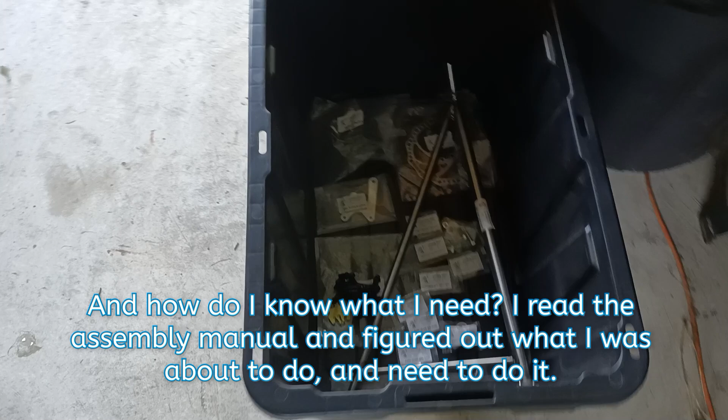Alrighty, so this is one of the boxes, the landing gear one, which I had mentioned in the inventory video, that I've got all categorized and all nice together and easy to see. What I've done though is I've taken the parts that I know I'm going to need for the landing gear and I've put them into my working box. And this is pretty much everything but the tire and the rim, aka a wheel.

And I'll be pulling the parts out of here. You just group them by common sense. You know, you're not going to be putting on any cables or anything, so they're not in here. So everything that I need to build the left landing gear is in this box. I hope. I'm pretty sure I have everything I need. If not, simply go back to the landing gear, find the part you need, and keep going.

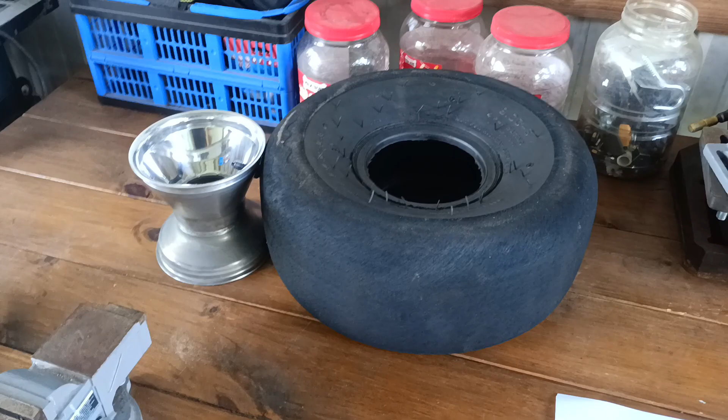So back over here, we're going to take a quick look at the tire and the rim, or wheel, as it's referred to in the manual. We've always known these out in the West as rims, but I guess they can be called wheels too. We've got the tire. Mine are tubeless tires and non-split rims. If you have split rims, the installation is rather unique. Definitely go online, see how split rims are put together.

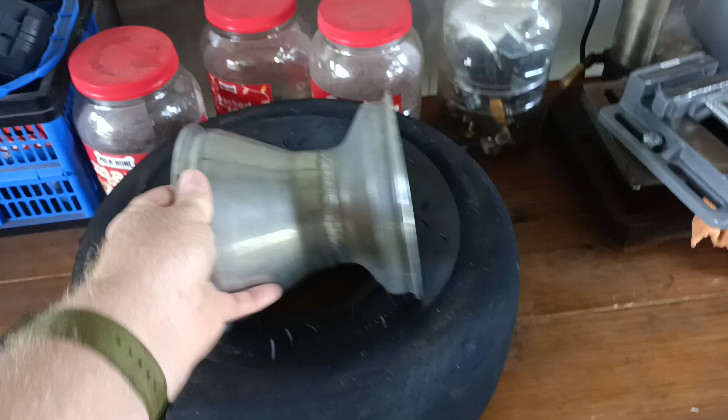And there's a lot of good people out there. Look at how aircraft split rims are put together, not somebody's tires on their truck or something like that. That's a little different. But the procedure is close to the same, though. You got to be careful on split rims because you've got two pieces here that clamp together, and bolts hold them together.

And because they are split, sometimes the tube will get caught in here and get pinched. So there's ways to get around that too, so you can get a tube in there without it being pinched. Some people put tape around the split, and as it comes together, it protects the tube from getting caught in the split. Others put a little bit of air, very little, but just enough in there to where the tube sits in here, but it won't get pinched.

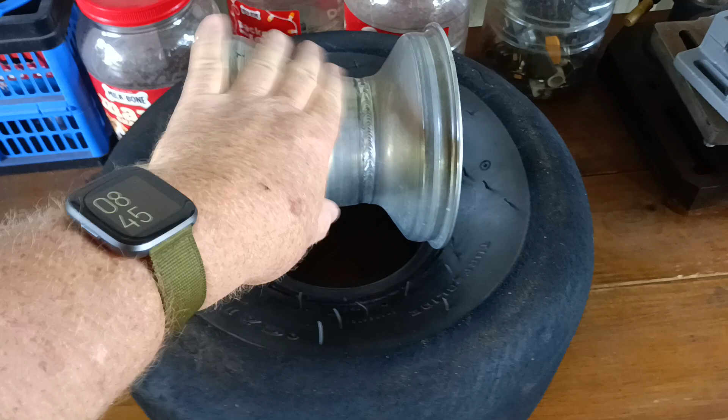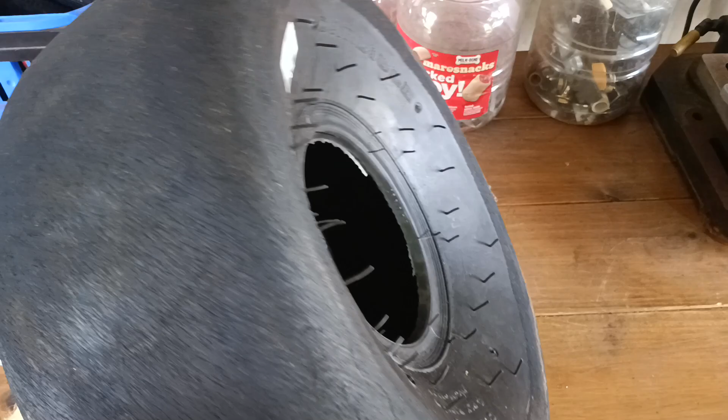Some people just take them to a shop and find a shop that'll put them together for them. So that's also an option. What I've got is a little bit different without the tubes. These are tubeless tires. You definitely have to get the bead here, which is on both sides of the tire, of course, against the edges of my rim.

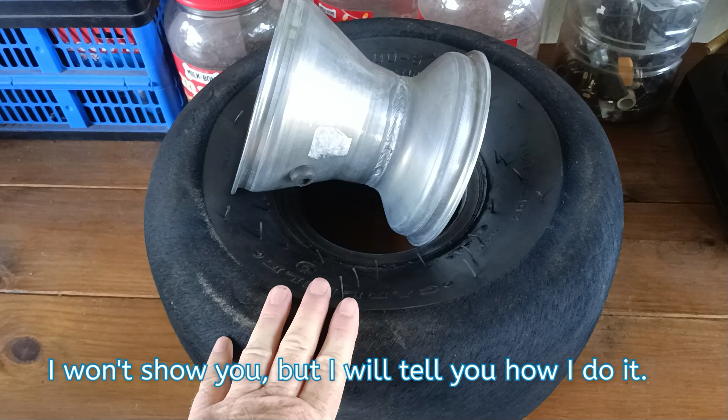And to get it to do that is kind of a pain. There's several ways of doing it. I'll explain that when I get there. I won't show you the way I do it, just to give you the ideas of what's available and leave the decision up to you.

Now you'll see that the rim, or the wheel, is almost as wide as the tire itself. So how does the bead of the tire get clear out to the edge of the rim to pop on? That's one of the things I'll explain to you. I won't show you how I did it, but I'll explain it, and you can make your decisions.

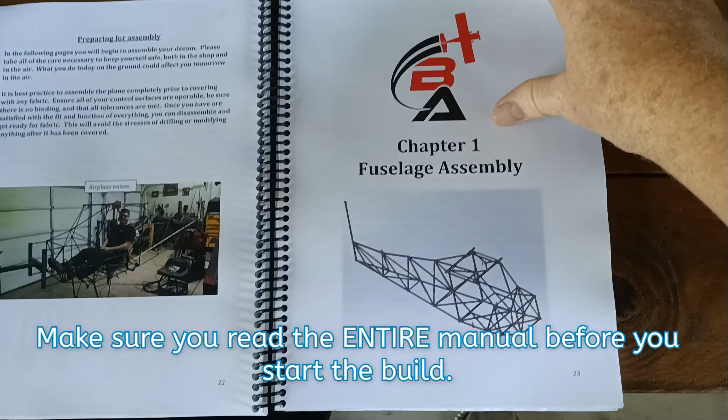First thing, though, is to jump to the manual, Chapter 1, fuselage assembly, and the first section of it is landing gear, main landing gear and brakes. So read through this section of it. It explains some of the things you do and do not do. Just good information. Now, like I told you in the inventory video, this is not IKEA. This is not step-by-step. They're not going to do that with you.

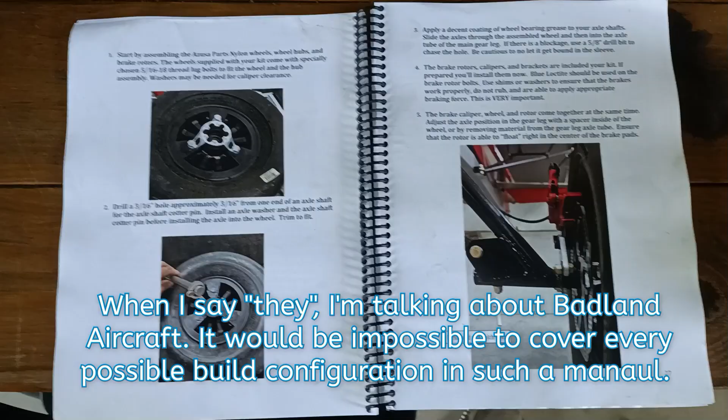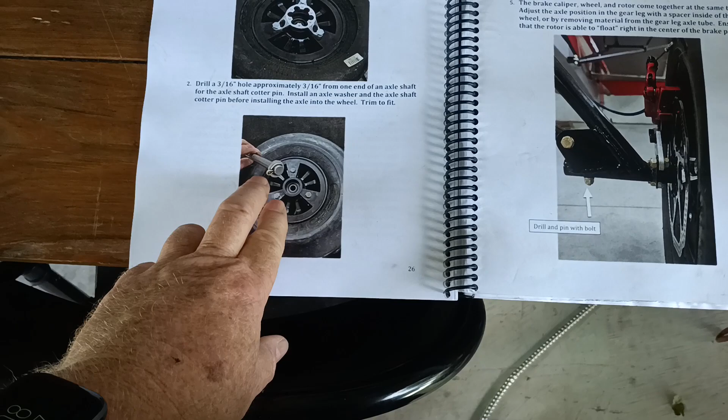The manual would be thicker than the Bible, thicker than the IRS tax documentation. What they do is they give you general information on how to put this stuff together. Some of the pictures will apply. For instance, this one does, and some will not. This one doesn't apply to mine because I actually have an axle with threads at both ends, and I put a nut on, where this is a washer with a cotter key to hold the wheel on. So it may be a little bit different.

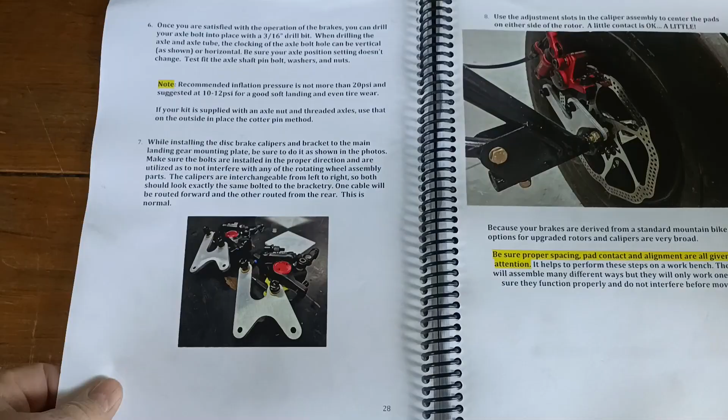You have to think things through a bit. There's plenty of pictures to see how things are done. And again, ask questions if you don't understand. I'm terrible with comprehending written documentation. I'm a learner by basically seeing it done.

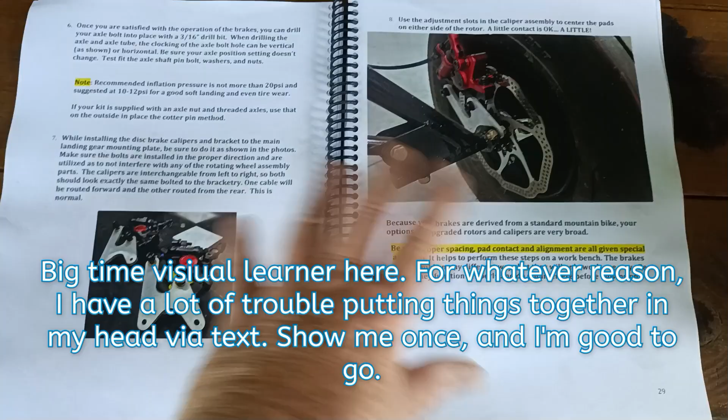Visual learner, there we go, there's the word. And so this is really difficult, and we're just talking the wheel here. It was really difficult for me to first understand it until I got with some of my friends on the forums and said, "Hey, what's this mean?" And they explained it, and we discussed it a little bit, and now I understand what's going on.

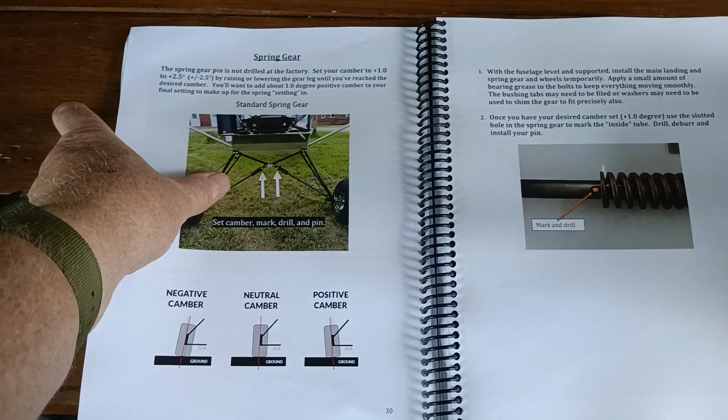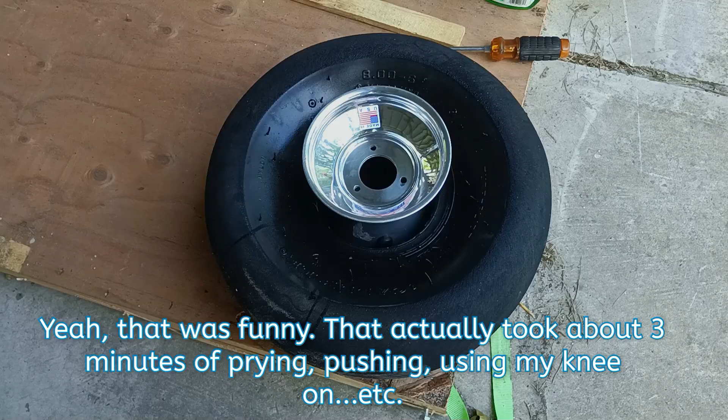Alrighty, well, whew, I got the first side in. That's going to be the easy one. And yes, I had to use a screwdriver and slowly pry it in until it slid on there and got on there all the way. So let me get the second one going here, and we'll see how long that takes.

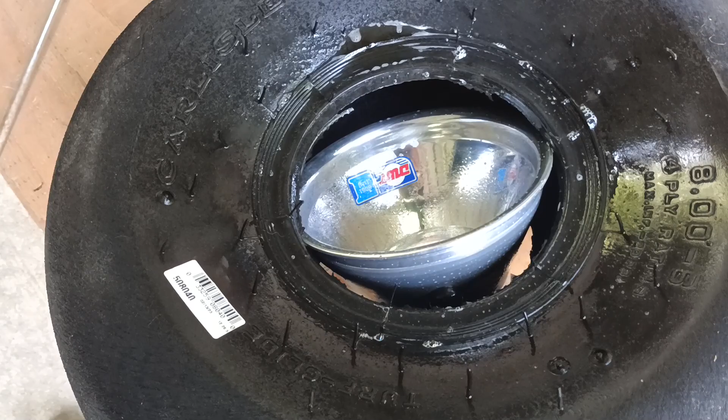All right, so I've got this one started, the other side of it, but notice there's soap around that. So definitely use your soap liberally. It helps to slide this stuff around. Otherwise, that rubber sticks like glue to that rim or that wheel, and it's a pain in the butt to get in there. So definitely use a lot of soap. It's not going to hurt anything.

Okay, one aired up tire. So how did I get these beads to seat against the rim so I have a good solid tire? Well, it's not too difficult, really. The way I did it, I kind of regret saying this because somebody's going to screw it up for sure. As you know, the tire did not touch the rim. The bead did not touch the rim. That's a problem.

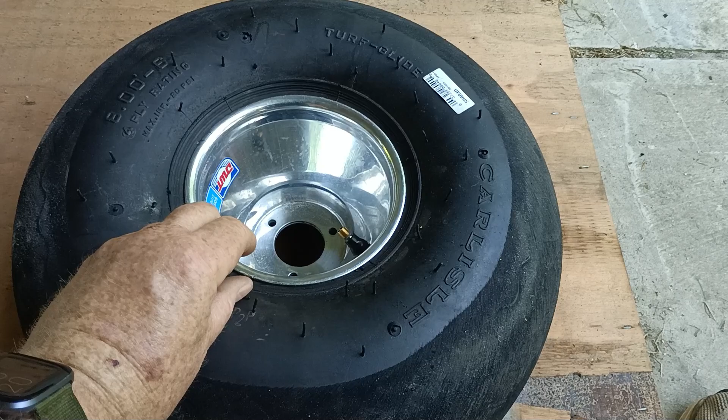So what you end up doing is laying it flat like this on a surface, and there's the gap between the rim and the bead, and very, very lightly you squirt some ether starting fluid down into the rim, all the way around. The big problem that you see on YouTube is people dump half a can in there. Yeah, it doesn't take much. Just that's it. That's all that's needed.

If you do not enough, it'll just flame out and be fine. If you put too much, you're going to blow this thing all up and it'll be nasty. So number one, not very much ether down in there. Very, very little. Do it all the way around. Do not just do it here because you won't get an explosion, and that's kind of what you need. You need an explosion to pop this tire out far enough so both beads on both sides touch the rim and they'll lock in place.

Now, here's the next one that these idiots on YouTube keep forgetting about. You see this valve stem down in here? Take it out. Use a valve stem tool and take it out. That gives air some place to go instead of exploding a tire. You may save the tire that way if you put too much ether in there.

Just be very, very careful in doing this. You do not hold a match down here. You don't want to be near this. You want to have a propane torch or something like that, a lighter with a long extension on it, just something that you can get close to that ether.

Once it gets in there, it's going to pop this tire real quick and pop both sides out, and they seat. And then once it's cooled for a moment, you can go ahead and put your valve stem back in, and then you can air it up to about 6 pounds, which is what I got this one at. But you can air it up to whatever you want. But very, very important. Let me reiterate once again, this is dangerous. It's not the best way to do it.

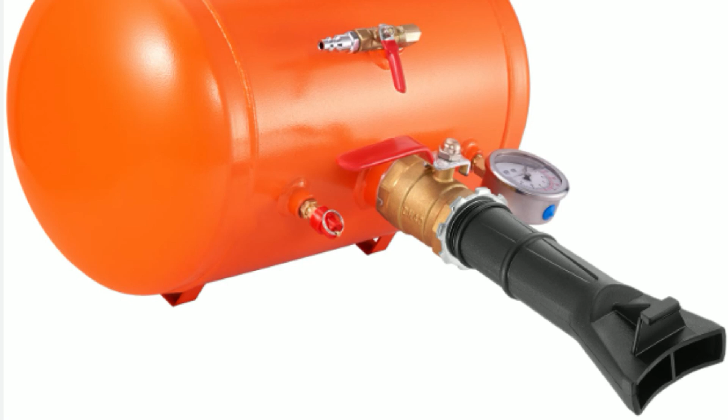The other method uses a large air tank with a very large nozzle, and they stick the nozzle down towards the gap that's between the tire and the rim, and then they pull a very large valve that shoves air in there so fast that it pops the tire.

Now you can take it to Discount Tire or any other tire place, and they can do that for you. It's a safer way to do it. It's much easier to do. There's no chance of getting anything to explode on you. This is the way I've always done it since I've been 13 years old. It does work if you do it correctly and if you're safe about it. All's good, and I have a tire ready to go.

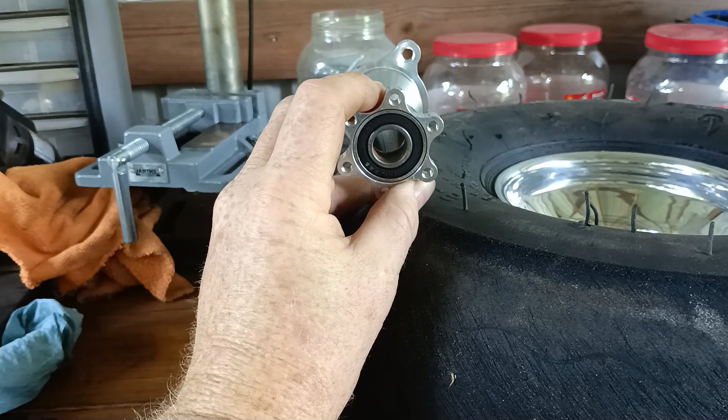Okay, so our next step here is to put on the hub, which is going to hold one side to the rim; the other side, the six-starred side, holds the disc or rotor for the brake. And as you can see on this, I've already got the bearings in here. And I'm sorry about that. I should have waited and showed you how I did this.

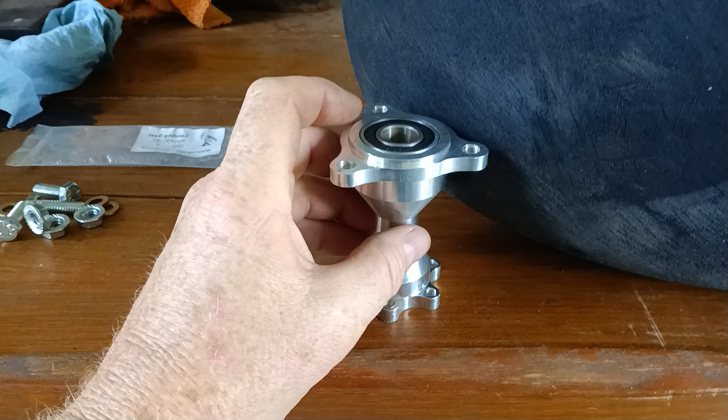Lots of times these bearings won't fit inside of these pieces of aluminum. So the normal thinking is, well, get a block, put it on top, and pound them in with a hammer. That's probably not the best way. One of my friends, again on the Badland forum, said, take the aluminum, put it in the oven, 350, 400 degrees, let it get really hot. Take the bearings, put them in a plastic bag, and throw them in the freezer. Let them get really cold.

What that does is it shrinks the bearing down, and it makes the hole, this part here that the bearing fits in the aluminum, expand. So the two slide together. In fact, they'll fall out typically. You got a hot glove, of course, because this thing's going to be really hot. And you'll drop the bearing in there, and then you'll turn it over to put the other one in, and the bearing falls out on the counter. So just something to be aware of.

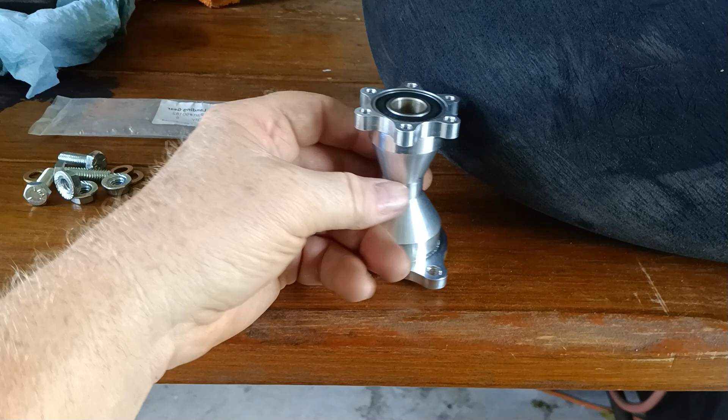If you're going to do that, lay it on its side and then flip it up real quick so it holds that bearing in there. Once the aluminum cools down and the bearings warm up a little bit, they're not going to come out. They're in there for good. So that works out real well.

So how's this go in the tire? Well, pretty simple, really. You're going to have your disc right here. So you can see that looks pretty good. That actually would work, but this would not work. Number one, the disc isn't going to be far enough out for the caliper to get to. And two, how are you going to air up your tires if you've got this disc in the way? So it's obvious that it goes the other way, just like that.

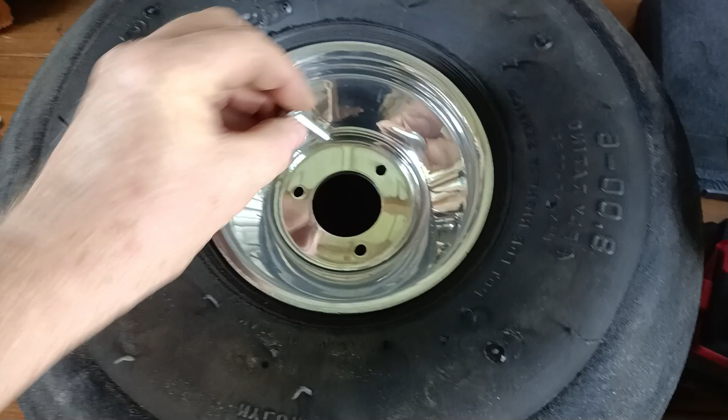Now I had a little trouble with the right tire, and I've had a little trouble with the left one, and I'll show you. These are the bolts that came with it, and look, they won't go through. So I've got to drill these out slightly. I believe that's 5/8, I'm not sure. I'll have to match it up and make sure. And also, as we screw this in, if I can get it in with one hand, there we go. The threads aren't real clean.

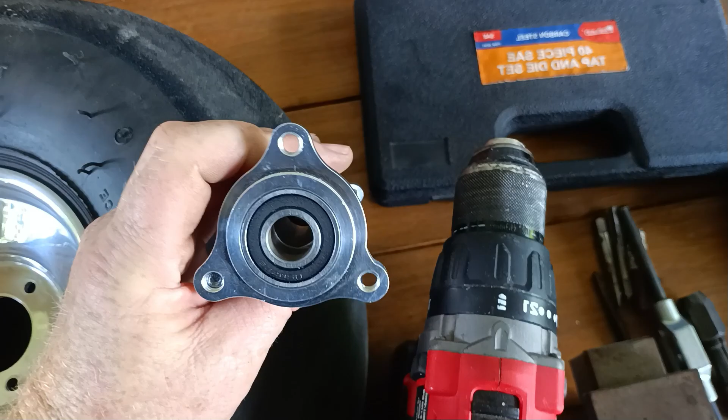So over here I've got my drill. Where'd I put my bits? Oh, there they are. Got a set of cobalt drill bits. Definitely worth the investment to have new drill bits. Also got my tap and die set, so I'm going to tap these out and make sure the threads are clean, and then drill these out to make sure the 5/8 can get through them. So let me get that done, and I'll show you what it looks like afterwards.

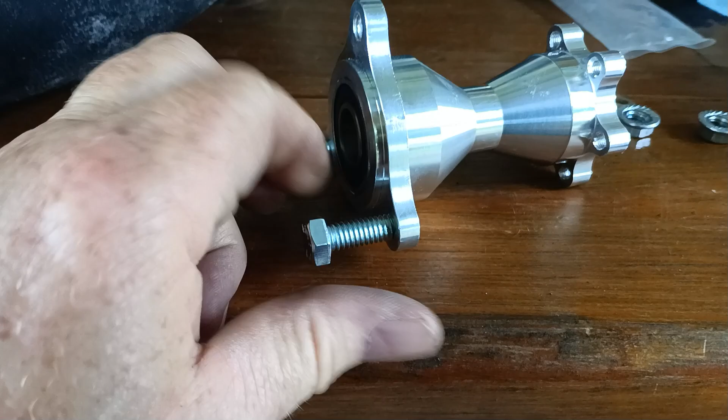Okay, so I've got these threads retapped, and as you can see, the bolts are going through really nicely. So I will put these on the wheel, or rim, as I call them. The way these bolts go in, it's up to you really. Some people have the nuts on the outside of the tire, so they just unscrew the nut to get the tire off, and these act as studs through the aluminum, through the hub. I don't particularly care for that design, so I've changed it up a little bit. I gotta get this all the way out, a little booger.

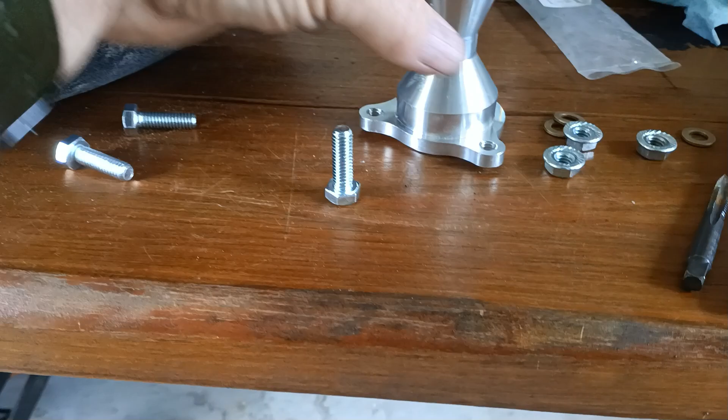I'm actually going to go a little bit different. I'm going in through the rim this way, and so the bolt comes out the other end, and then, because these are threaded, I'm going to use the nuts to lock down on this side of it, which will lock the threads in this hub and in the nut, and these will never back out. It's virtually impossible for them to back out.

Now, to take the tire off, of course, I have to loosen up the inner nut, which may be a little difficult to get to because the ring is going to be up here for the brake, but I think I can snake down a socket wrench through the holes that are in the ring to loosen these up, and once they come off, these should back out from the other side without a problem. But let me go ahead and get those on, and we'll move forward. Slow but steady.

Okay, I almost forgot this step. These bolts won't fit through there. You can see they're just too tight. I forgot to get out the drill bit and drill these out. And by the way, I kept saying 5/8. These are 5/16. And how do I know? It's the only drill bit I've used so far out of this kit, so they have to be the 5/16.

Or excuse me, let's see. Yes, they're the 5/16 because they're here. Yep, definitely 5/16. So let me drill these out so I can get the bolts through the other side and screw them into the hub here because these are threaded, and then put the nuts down on them and should be good to go from that point.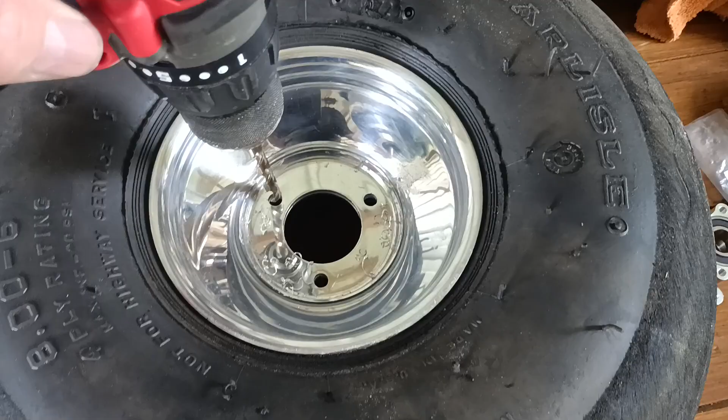All right, all drilled out. Let's make sure. Voila, that's the way it's supposed to work. If I can get it out of there. There we go. One of the things you need to know when drilling out holes like this, and this is covered in the manual: don't use any pressure. Just put the drill bit up there when you're drilling anything that's got to be cleaned out, and the drill will fall right through there. It'll go through straight, is what I'm trying to say.

If you put pressure, you might tilt it back or forward, and then your hole's not straight. If you just hold it on there centered and don't put any pressure, just start up the drill and let it slowly dig through. They cover the better ways to use small bits and large bits, and how fast you should run the drill. So just take that into consideration and you'll be fine. These are good straight holes, so I've got no problems.

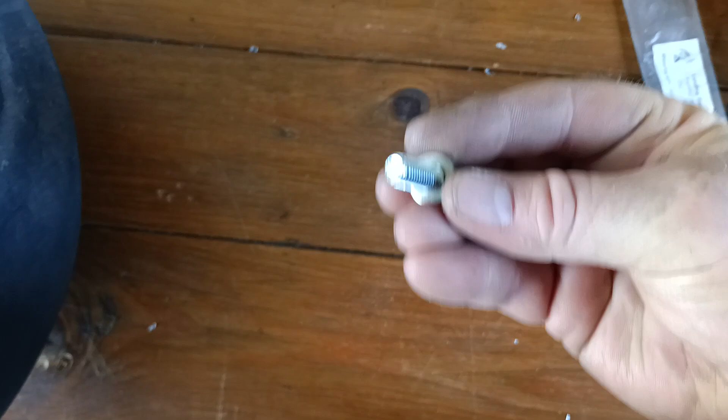Now, these bolts come with washers. I'm putting the washer on here because I don't want the bolt itself to dig into this aluminum. The washer on the inside isn't going to make much of a difference because there's no way for this bolt to unscrew itself. Let me get this all the way down in there real quick. Now I'm going to take a socket and tighten these up a little bit because they are definitely threaded on this side, as you can see in this aluminum piece. So they're holding everything quite nicely together.

And then once I put the nut on this side, which these are locking nuts, and tighten it down, it's pulling the threads that are locked inside of the hub and pulling the nut down on them, compressing those threads. So there's no way that this could ever back out. It's just not possible unless this nut comes off, which with it being a locking nut, it's not going to come off.

And even then, let's say that this does back out. This bolt has to unthread itself all the way out before it would let go of this hub. So it's got quite a bit of, I guess you could say, retaining power. So let me get these nuts on here, and we'll be just about ready, I think, to put the disc on. Okay.

One thing I want to mention is remember that these bolts have to be pretty tight, but you don't want to over tighten them. Remember that they're actually cranking into a piece of aluminum here. So if you know anything about aluminum, it's very strong, but you can strip out the threads fairly easily. So get them good and snug, really good and snug, but you don't want them over tightened, otherwise you'll just strip it out and you'll be buying a new hub.

So the nuts now, because they are locking nuts, will slip on here quite nicely. There we go. Spin those down, and I'm going to go ahead and put the other two here on, and then we'll move on to putting the disc on. Piece of cake.

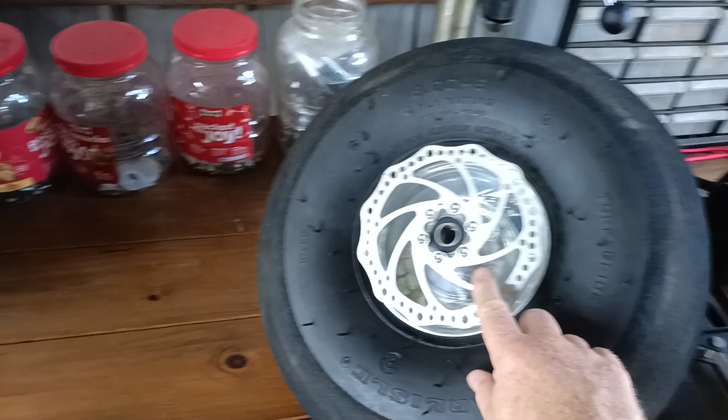All right, let's see if I can keep my finger out of the way. I went ahead and put the disc or rotor onto the hub here. I didn't think I needed to really show you how to do it. It's 6 bolts here that come with the kit. Now there is one difference that I've made on this that you don't know about, and that is I had to stand the disc off.

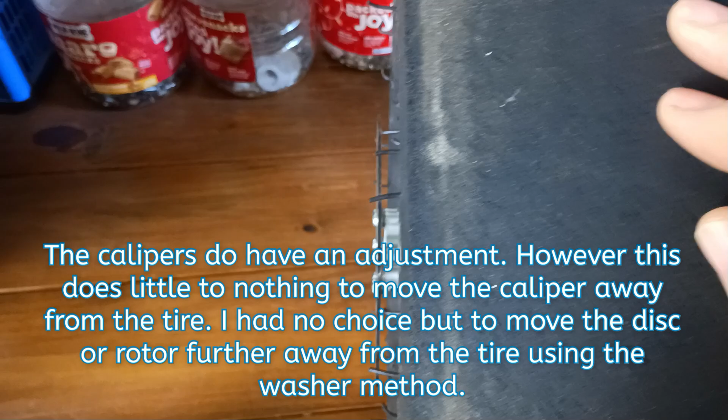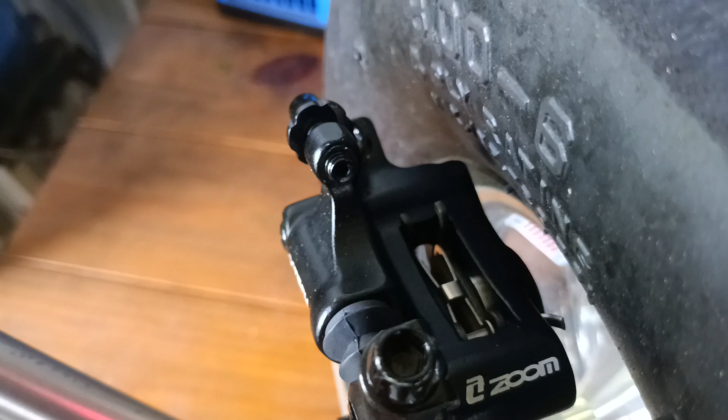Let's see if I can get a shot right there, just a little bit. Come on, focus. Doesn't want to focus for me. Just a little bit off of the hub because my calipers would touch the side of the tire here. And so I've had to put washers in between the hub here and the bottom of the disc so it pulls it out slightly. And on the right, you can see it's still fairly close. It was much closer. In fact, it rubbed when I had it without the washers on there. So I had to put washers to bring this out slightly.

And you don't have to worry about it too much because the hub itself, you can see my finger on the other side there. There's nothing supporting there. It's all supported directly under the bolt. So as long as you've got the washers in there, that's just as strong or darn near close as having this disc or rotor directly against the hub itself. So it's no big deal. Got them in there and got them in the way that I like them. They seem to work well.

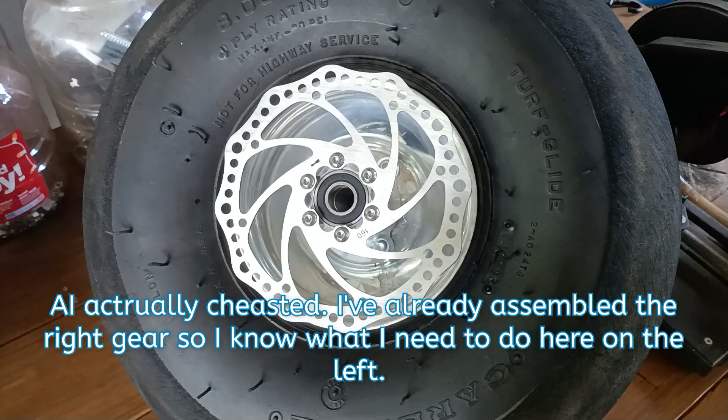So our next step is to move on to putting an axle on and then starting to assemble the A-arm, which will come up here and hold the landing gear. And I've got to make adjustments there. I already know what I've got to do because I've already made them over here, but I'll show you what I've got to do. You may not have to do these adjustments, or you may. That's going to be something you'll have to assemble, start fitting pieces together, see if they fit well. If they don't, make the adjustments necessary to make them fit well.

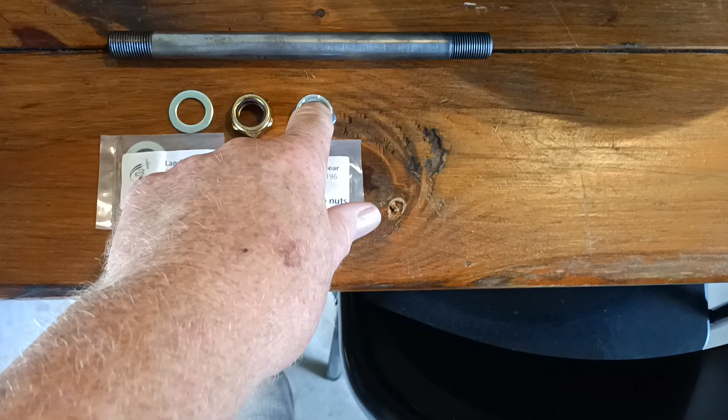Okay, looking at the manual, there are different types of axles and different types of mounting that come with this airplane depending on what you order. Mine has a nut, which you'll see, this standard nut here. It's the same size as what comes with the kit for mine. I picked these up as temporary because I don't want to wear out the nylon ring on the actual ones that I'll be using. So these are kind of like in standby mode. The washer that comes with it is probably the same one that you'll get.

The difference, I should say, is you see that my axle is threaded at both ends. The other axles, I believe, are not threaded at the outside portion where the nut would normally go on for mine. It's just a straight shaft, and you put the washer on, and then you drill a hole for a cotter key to slip through, and that's what holds your wheel on. So again, we're talking ounces, but ounces count in ultralights. In my case, because I have a titanium aircraft, I've got a little wiggle room, so it's lighter than a standard 4130 built aircraft. So I get to use a nut. So I'm going to do that.

And I'm going to put that nut on, same as this one, just down far enough to where I like it in the position that it's in. I'll throw the washer on there, which you can see the washer right there, and get that axle in there. The axle does not screw in. It will fall right back out. So something to be aware of. If you flip the tire and you've got the axle in it, it's going to slide right out until you get it actually mounted onto the A-frame, or excuse me, the A-arm here. And then it'll stay in place and won't slide out anymore.

Okay, so axle slides right in. One of the things that you're going to have to take a look for is I had to actually run this across the wire brush over here and get it cleaned off. It was just rusted to pieces. I mean, I'm over exaggerating there. It was rusted, but it was a light rust, but still, it needs to be clean. And then I'll throw some WD-40 on it, and later on I'll put some grease on it. But right now, just going to go ahead and install it.

The washer's down there, and didn't want to go through the washer right now. There you go. And away it goes. So very sweet. And of course, comes out the other side. So we'll go ahead and put the A-arm and put the caliper, which is sitting over here, on it, and we'll go from there.

All right, now the fun part. We're going to put the caliper brake bracket on, and this is the mount for it right here on the axle shaft itself, and of course on the A-arm. Now I got lucky in that my chainsaw sharpener happens to be right next to my vise, which is holding the arm, which allows the wheel to rotate and be easy to work on. So you may want to rig up something that allows you to work on this without it moving around, because if you have both pieces moving around, it just drives you crazy.

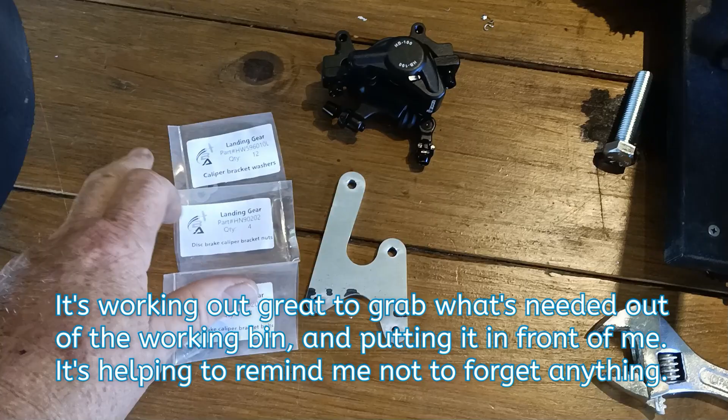Over here, I've got my caliper. Got the caliper bracket washers, caliper bracket nuts, and caliper bracket bolts. So I've got all the parts I need there. This is the bracket itself. And the fun part is, of course, now learning how to put this on. There's only one way that it goes on, that it works. So you got to kind of figure it out by putting it on and trying it a few times and seeing how it's going to fit.

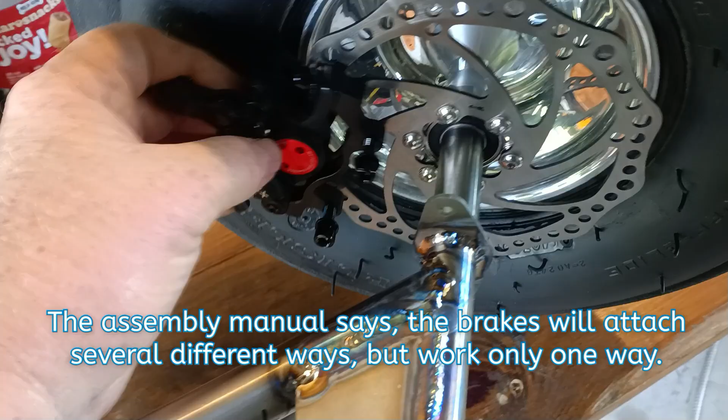There we go. The other thing you need to know about the caliper is that it's going to be backwards from the one that's on the other wheel. Now, why is that? Well, these brakes are made for off-road bikes, on-road bikes probably too. But you notice on a bicycle, these both go on the same side of the bicycle. Of course, on an airplane, they don't. One goes one way, one goes the other, and you got to just figure out exactly where it's going to go. So I'm going to figure that out just by trial and error and get it to where it needs to be. It's probably going to be somewhere up here is what I'm thinking.

And then I'll probably have to do a measurement, see how far my caliper is from my disc, translate that over to, I can't get it to slide with one hand, there we go. Translate that over here and find out where I need to cut my shaft here to bring the disc close enough to where the mount is.

Now the caliper does have some adjustment screws on it that allow you to move it in and out slightly. And then you also have washers, as included over here, that will allow this bracket to be moved in and out if necessary. Now it's best if it's straight on there, in my opinion, if you put the screws with the washers up here. But that's up to you, it's your call.

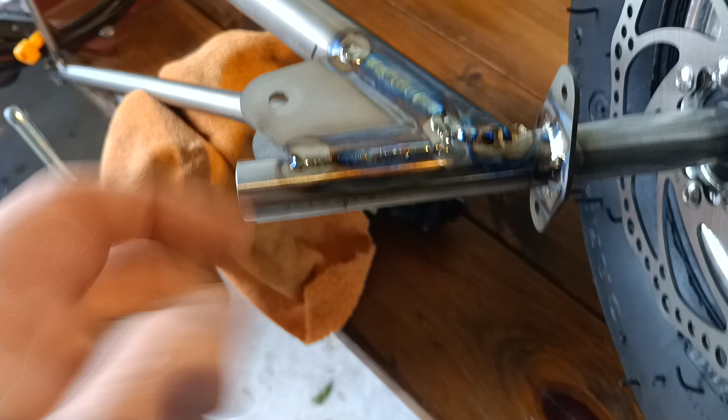And just to give you an idea of how far I'm going to need to cut, there's a bolt that's going to go through here, right about here, and stick down, and that holds the shaft in. You'll drill a hole in the shaft, and then the bolt goes through it after you drill a hole in the tubing, and I'll show you how to do that really well so everything's aligned properly, and that keeps the axle from sliding out.

Just to give you an idea though, that's the bottom of the shaft, is clear over here. I need that shaft clear over here, so I'm going to have to take quite a bit off of here, and I'll get that done, and this will slide over nicely. The caliper will be here. It'll fold over the disc nicely. It won't touch the tire. I'll have my hole here for the bolt that'll hold the axle in, put the nut on, and basically this part's done. So let's get going.

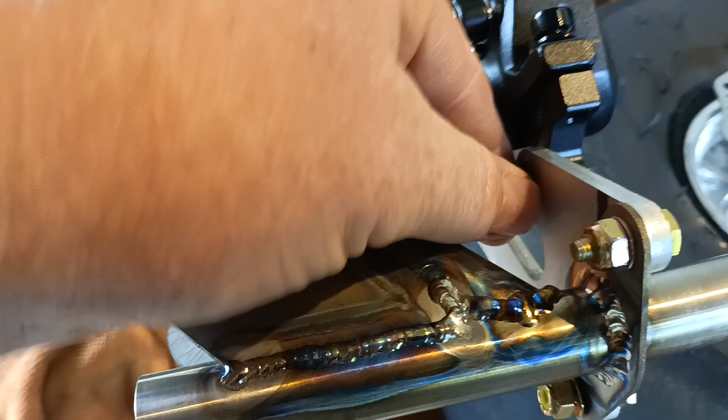So I've found out which way, by trial and error, that my caliper goes on, and matching it up to the one that I've done over here. Looks the same. Now, I haven't tightened all the bolts down. This one's still loose, and this one's tight though, so I can use this to get a good measurement. I also tightened up those to make sure I get a good measurement.

One of the things I forgot to mention is I ordered additional washers, 2 additional washers, 1 for each wheel. The kit does not come with a washer that goes in here. It's not necessary, but it's something that I like to have just to have some reinforcement there. Otherwise, all I've got is my shaft here, axle shaft, pushing against the ring here of the bearing, and I'd prefer to have a little bit extra support there, so I put that in, and it seems to let the wheel spin quite nicely. So I like that idea.

Let me go ahead and put this wheel here and this hub right against here, and I'll do the measurement and see how far I have to cut this shaft back, and I'll mark it just with a simple Sharpie, and then put it over here on the little cutter, the chop saw, and I'll cut it. Now, the ideal thing would be to have a full-size chop saw. I've got this little Harbor Freight one, little dinky one. It's done me well for years.

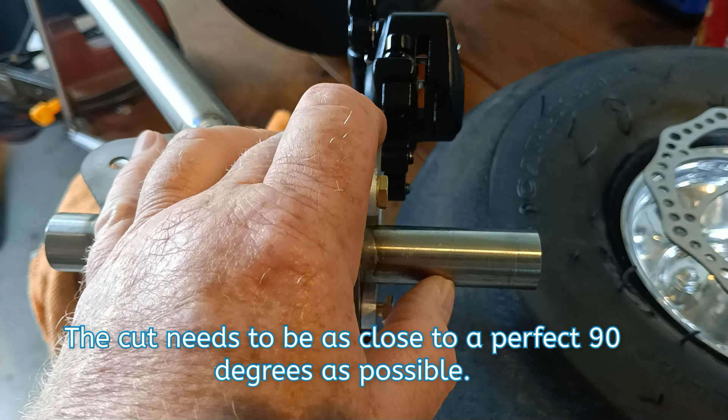It does make cutting this a little bit difficult because, of course, the mounts are already on it, and the welds and such get in the way. So I have to be really careful when I cut this because you only get one shot at it. Otherwise, you could screw it up bad and end up having to order another A-arm here from Badland. But so far, I did that one right. Let's see if I can do this one right.

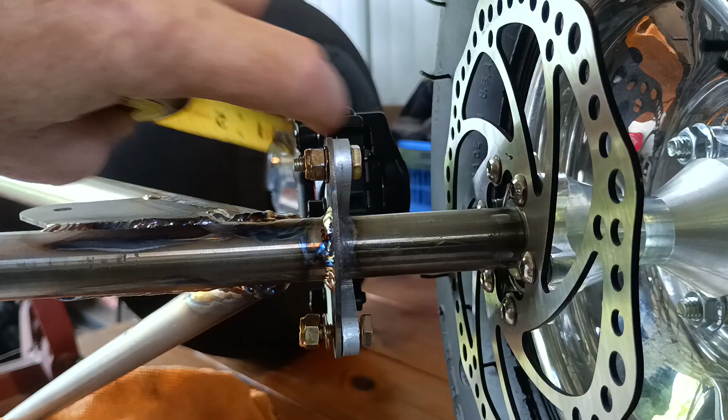Okay, so this is the fun part. Now I've pushed the tire over here against the washer here, so the axle shaft is all the way in. You do have to be careful not to bump it because it'll cause your measurement to go a little screwy if you do have to do this cut. Some of you won't. And what I'm going to do is measure out to where this slit is right in here, and I don't know if you can see just a little bit of light coming in there, and it comes out to 1 inch and looks like 5/16 right about there to get into the slot where the brake is, where the brake pads are.

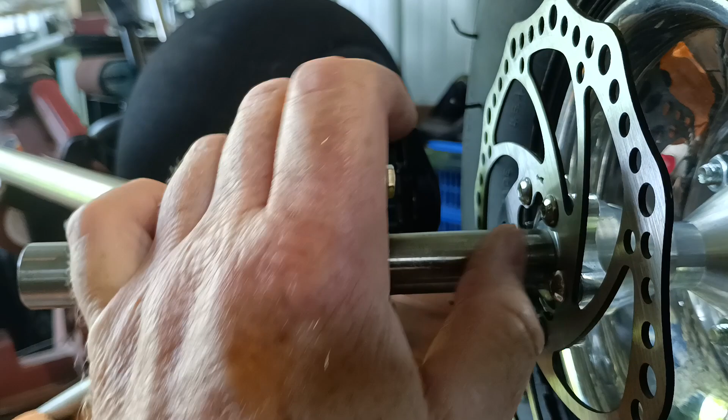So, easy, there we go, right there. So it'd be 4. It could be 6, but I'm going to cut it at 5, and that way, in case I am a little bit long, I can grind it off. That's much easier than trying to add anything on. So always measure twice and then cut once, as they say, and that applies to this big time. So let me go ahead and get that marked on the shaft from here out, and from this down, make sure both measurements are identical, and I'll mark it, and then I'll go ahead and cut it and keep my fingers crossed.

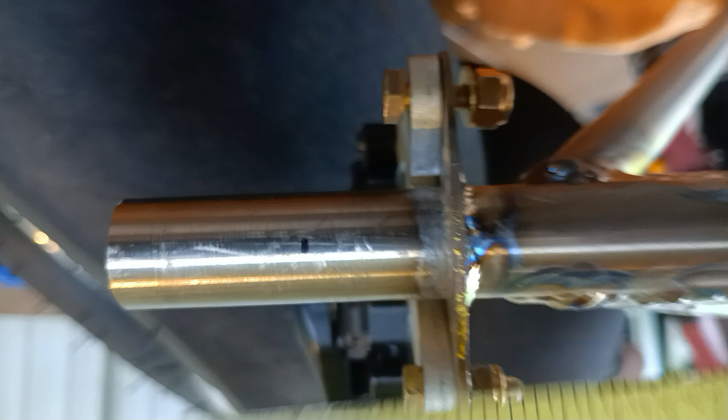Alrighty, so if I measure it out, I'm at 1 5/16 on the nose. So let me take off the caliper here and the caliper mount and put that on the chop saw and get this cut.

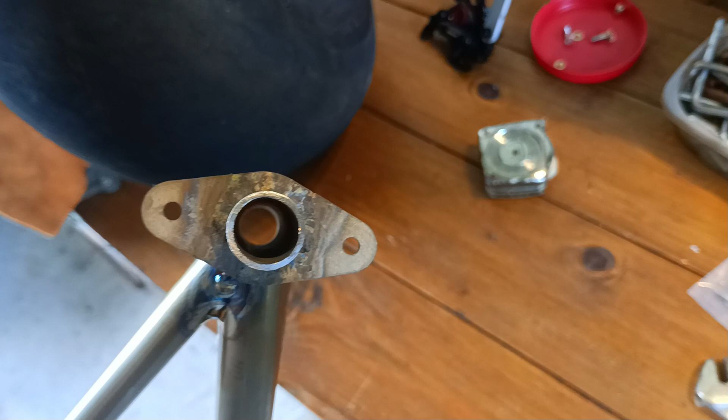Okay, cut's done, and you can see it's kind of nasty looking, so I'll take a Dremel and clean that out. Use the wire brush here mounted on the table, my workbench, and clean the outside of it, and then go ahead and set it all back up, and hopefully that's going to slide onto here quite nicely. We shall see. All right, that cleaned up rather nicely. So let's see what we got here.

And voila, she rotates. Now it does drag. It's going to drag until I do some adjustments on that caliper, possibly having to put some washers in here to scoot the caliper over. Most likely just adjust the caliper bolts themselves, and that'll take care of that problem. So looks good though. Doesn't spin as good as the other one, but I'll get it there.

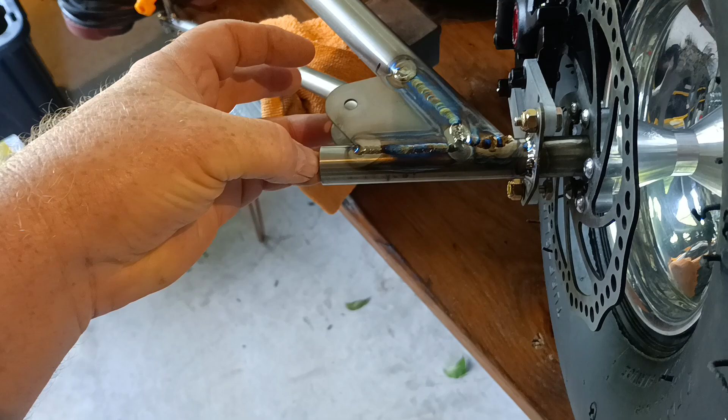And you'll see I can only stick my finger in that far, so that means the axle is right there, which makes it much easier for me to drill a hole down through this thing so I can put in the axle pin that will hold the shaft in place. But very pleased with the way this came out so far. Just not difficult, just take your time at it, and got good clearance between the tire and the caliper, so no issues there. Looks like it's going to work out really well.

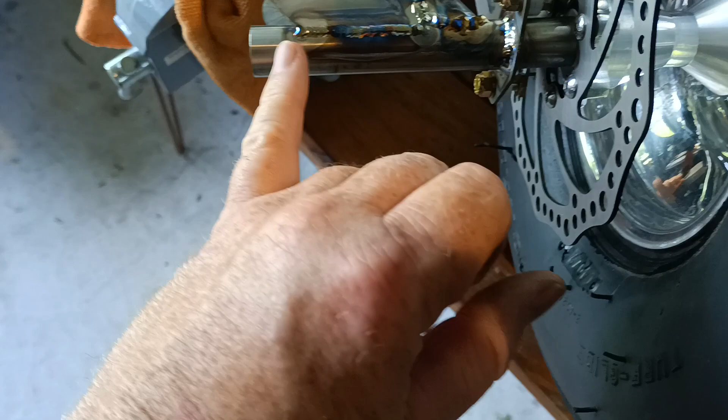So let me get this hole drilled, and I'll show you how to do that to make sure that you get a perfect hole straight through. Because the biggest problem with drilling in two different shafts is getting the drill to go through them both at the exact same place to fit a bolt in there. Sometimes people will go off at an angle instead of going centered. All kinds of fun stuff happens, but I'll show you how to get around that, and it's really easy to do.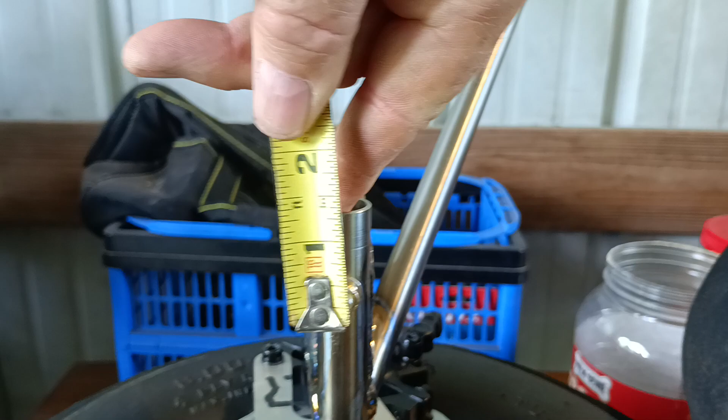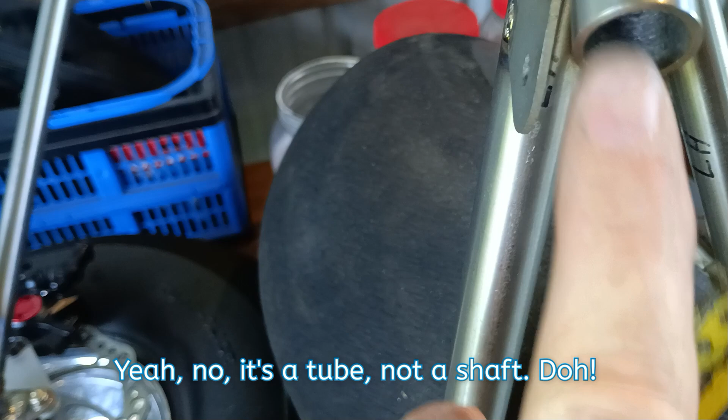All right, so the axle bolt that's going to hold the axle in is approximately 1 inch in. So I'm going to go here about 1 inch. I'm going to put a dot right at the end of that, and then drill through that. Now, I don't want to drill through both sides of the pipe of the tube. I want to just drill on this one side. That's as far as I want to go, and get it as centered as best I can. So let me get that done, and then I'll show you why.

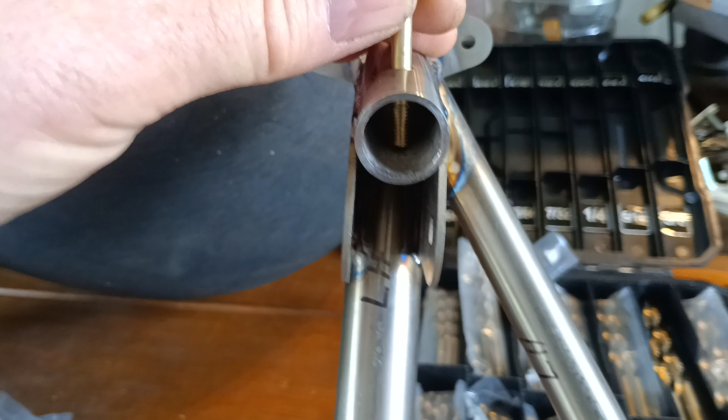All right, so the bolt fits nicely. Not real snug, but plenty good enough for this. And so you can see it goes down, but there's no hole in the bottom, and I'll show you how to get that in the right place. We're actually going to drill through the shaft. First, let's see if I can do this with one hand. Putting our wheel back on. Make sure you get all the washers, everything in place. And we're going to just kind of simulate it. And it is tight in there a little bit. Hang on a second. Okay, sorry about that.

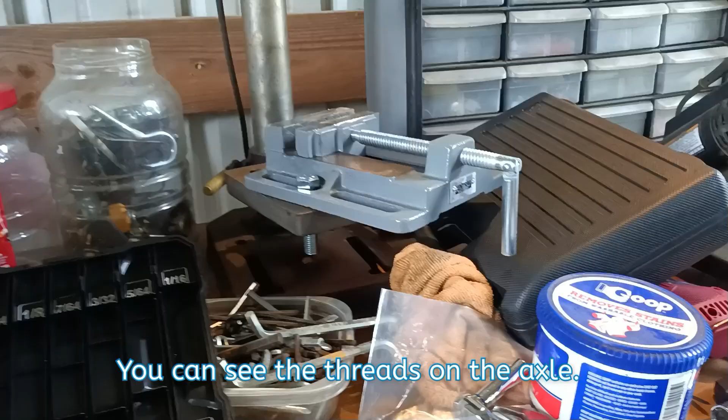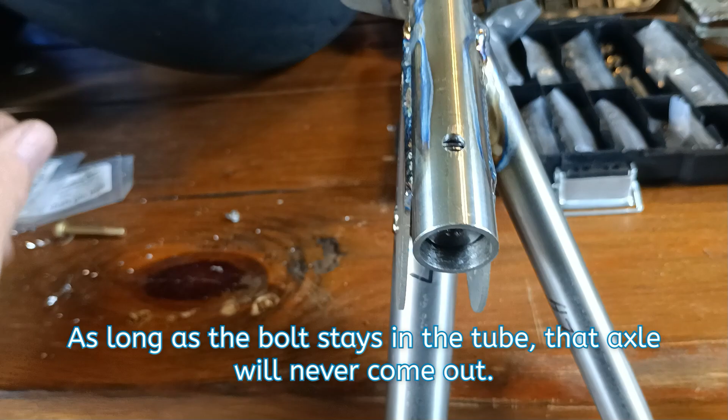And what I'm going to do with this hole down here is use a Sharpie and mark that on the axle right there. Then I'm going to pull the axle out, put it on my drill press, drill a hole straight through it, put it back in, take the drill, and drill the other side. The axle hole and this outside hole in the tube are going to hold that drill bit straight so it comes straight out the other side, so they match. And this bolt will slip through all of them from this side, and I'll put a nut on the bottom. Other than adjusting the brake caliper, this will be done.

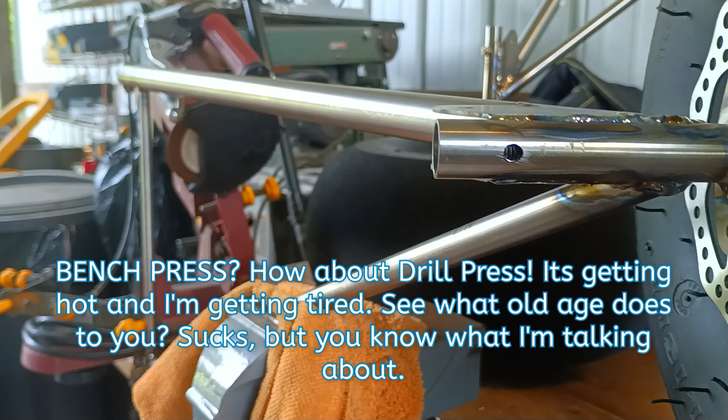Alrighty, so I have Sharpied the little point there where I need to go through. The axle and tire are all the way shoved this way, hard against it, so I know where to drill. So let me get that axle out of there, get it on the drill press, get a hole drilled, and keep moving forward.

By the way, I get all my parts out of my working bin over there as I'm doing this. And when a bag still has washers in it, like that one, I still need to use it. So I know they go on somewhere, and they tell you right on the package. Here, I'm done. I don't need the axle shaft pin nuts anymore.

Same thing with landing gear, axle shaft pin bolt. Yep. And disc brake rotor. Yep, it's on there. So as these bags become empty, I toss them back into the working bin, and I know they're done. It's something I don't have to mess with anymore.

So let me get this drill press out and punch the hole in this. And just to show, there's the dot. So I need to nail that. So make this as straight as possible in the drill press and go straight down right through it. So we'll see how that works. And voila. Nice straight hole all the way through.

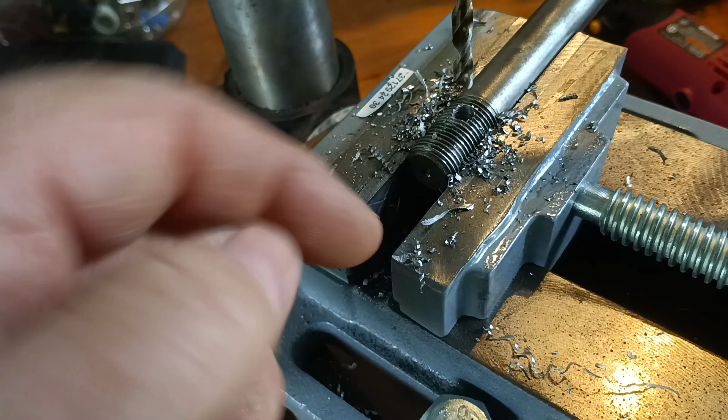By the way, if anybody hasn't told you and you've never used a drill press before, when you get windings like this coming out as you're drilling, that's showing you've got the right amount of pressure going through. You want a nice, even pressure, and it'll just sit there and peel that metal right out into a nice little windy, twiggly thing like that, and shows that you've actually got your pressure down right.

If you get a bunch of this small stuff, you're probably too slow. If you go too fast, it'll actually cause the drill bit to jam up, so you don't want to do that either. So we got the hole there. I'm going to clean it up with the wire brush here and put it all back together, and we'll see if that bolt fits through. All right, so there'll be a hole there. Bolt fits right in real nicely. So really happy with that.

And now we're going to take the drill and drill through the shaft and the axle at the same time, and it'll pop out the other side, and we'll have a hole straight through, which this will fit into perfectly. And there we go. Looks pretty holy to me. Let's see how this bolt fits in here from the top. I'll put a washer on before I tighten it down or anything, but just like that. That's going to hold that puppy in place.

Perfect. Very happy. That shaft cannot come out, though. It's impossible. It's got a bolt, or I should say the axle won't come out. It's got a bolt in there. It's not going anywhere. So that's that part. I'll get this mounted and do some adjustments on the caliper and be done with this puppy. There we go, all done. Well, I've got to put the caliper back on and all that, of course.

But to give you an idea of how good these bearings are and this hub and how this goes together so well, watch. That was just a light push on the wheel. And it goes, and it goes, and it goes. And it'll spin this way for quite a long time. It is slowing down, but it's taken a while. Bearings in these things are really good. The setup is really good. There's zero friction or very little friction, and it should work out quite nicely on the plane. Hope the brakes work well.

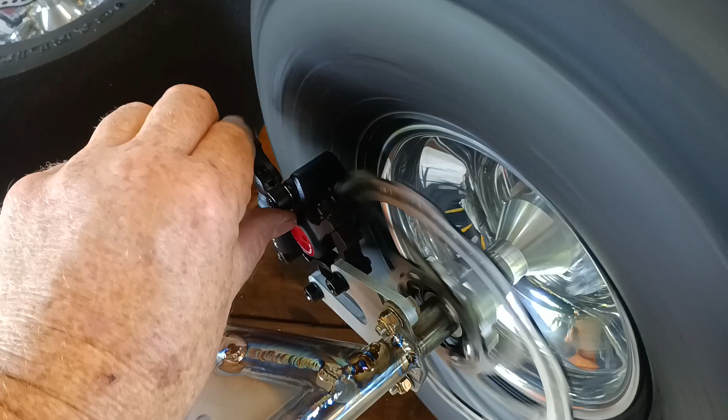Alrighty, it can't get much better than this. Caliper is adjusted. Of course, it'll have to be readjusted once it's on the plane and all that, but get this. No drag at all, none. Beautiful. And then hit the brake. Yep, she stops. So, working like a champ. That's how to put together a wheel, at least on the F5. Maybe a little bit different on yours, but the procedures are basically the same. The arm's looking good. I've got the left and right done.

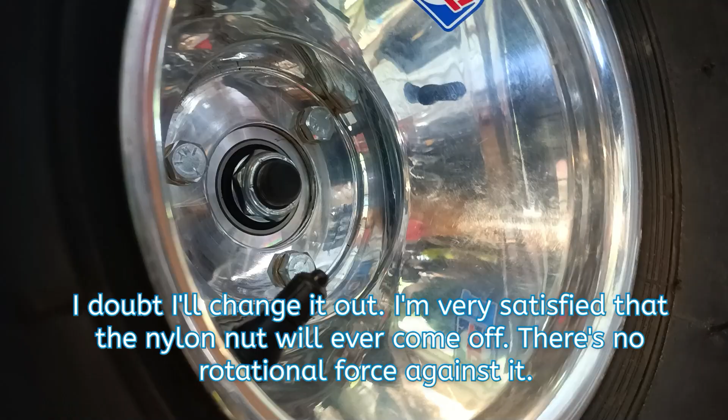So, the next thing is put the suspension on the front. And I might take this off and drill a hole for a cotter pin in there and put in a castle nut instead. But truly, the nuts that are on there that are nylon, there's no turning force against them, so they should not ever back off. And it's something you put on your pre-flight checklist. Just look down there, and if you don't see axle, something's wrong. It's that simple. But I can't believe how smooth this tire and wheel roll. Quiet as can be. Amazing.

So I hope you enjoyed the video, and we'll look at putting it on the plane.

There's a message for you. Oh, there's a message for me. Oh, how thrilling.

We'll get the suspension on and see if we can get the bird standing on her own two legs back there, and maybe even get a tail wheel on there too.